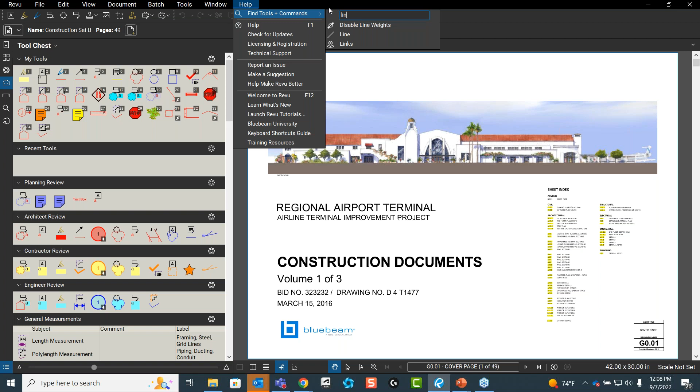Now, the other piece that I'll make for any newer users is a lot of times it can be kind of hard to find some of these different tools and commands. You know what you want to do, but you don't know what it's called. You can typically utilize under Help the Find Tools and Commands. As soon as you start typing it in, it's going to find that tool for you, and then you can just click on it.

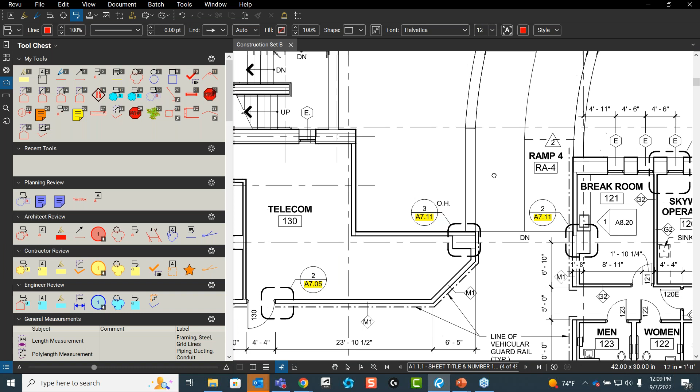So the next big piece that I wanted to talk about with your markups: if we use a tool such as this callout here, let me get over into one of my other pages. I'm going to place my callout. So at first, when I place this callout, let me make sure that my line width is set to 1.

A lot of times, by the way, you'll notice with your callouts, sometimes the Cloud Plus, your border line isn't showing. That's typically because your line width is just set to a standard of 0. You can adjust that to a 1, or even just grabbing your shape here and changing that shape will actually establish a line width for you.

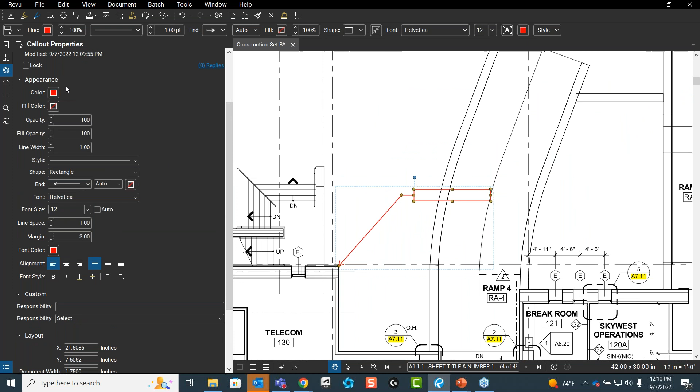Now, one big thing that I like to say here is that if you're changing anything about these tools, whether it's the color, the opacity, the fill opacity, and you know that you're going to use this callout tool like this every single time, or at least this is where you want to start from, scroll down to the bottom of your properties menu here, the callout properties, and you'll find Set as Default.

This just sets it so that when I go back to Markup and I go to Callout, notice that I don't need to adjust the line width or anything this time because it just remembers it. It starts from that every single time, so you don't have to constantly adjust that.

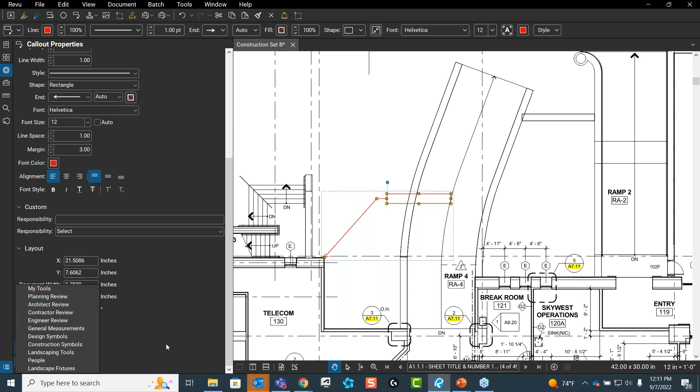Now, as we talk about customizing these markups, one big thing we need to talk about is the other way to save your tools, and that's going to be the Tool Chest. We talked about Set as Default at the bottom of your properties. Right above that is Add to Tool Chest, and this lets you take that tool and push it right into the Tool Chest.

Now, what does that do? When you save your tool into the Tool Chest, it allows you to reuse that tool. You'll notice here with my recent tools, I can click on that callout and it gives me an exact copy of that tool. But if I double click on it, it gives me the capability to start a new callout. This is a very helpful note. This is called the properties and drawing mode.

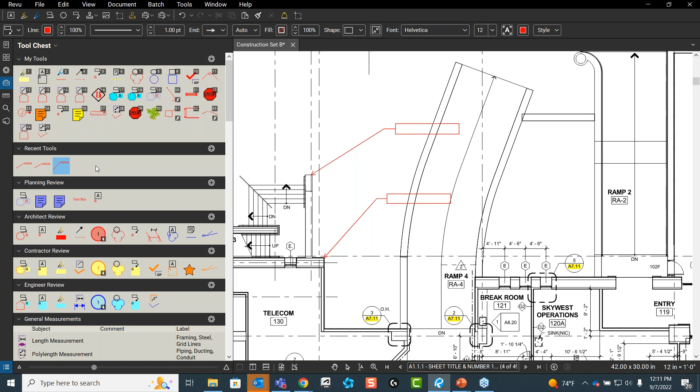Any of these tools that you save into your Tool Chest, if you double click on it, you'll notice that the symbol will change. If you have a common note that keeps coming up, like an RFI or see details, you can utilize an exact copy of that original and place it around as many times as you need.

Now, some of you may be asking, Dave, mine only lets me do one tool and then it escapes and I have to start over again. Well, for that, you want to look under Tools and then Reuse. As long as this is turned on, you should be able to keep placing those comments around the sheet or around the document as many times as you need.

But again, that's a double click, and that's that properties and drawing mode that are going to give you the capabilities there to essentially copy that markup and keep placing it as many times as you need to.

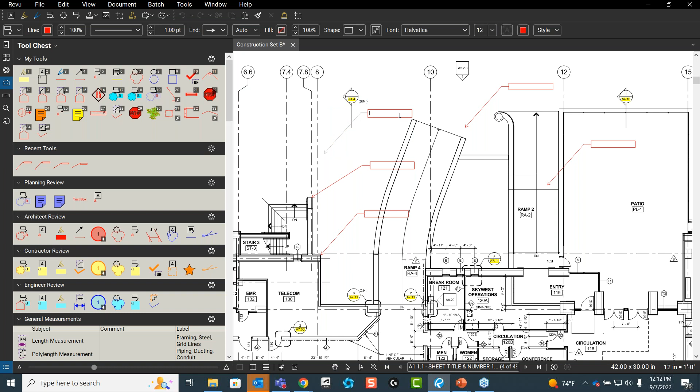Now, some of you may be asking, what's the benefit of starting over new though? Well, if you start over new, if I place a comment inside of here, such as See Detail...

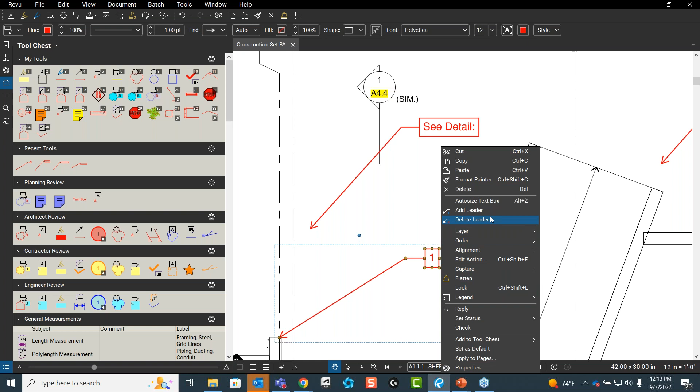Okay, now I probably should have said it was going to do this before I had it do it, but you'll notice that as soon as I finish typing, let's say I do 1 here, notice how my call out automatically sizes to the text within. I don't actually have to go ahead and right click on that and auto size text box. It's doing it automatically for me.

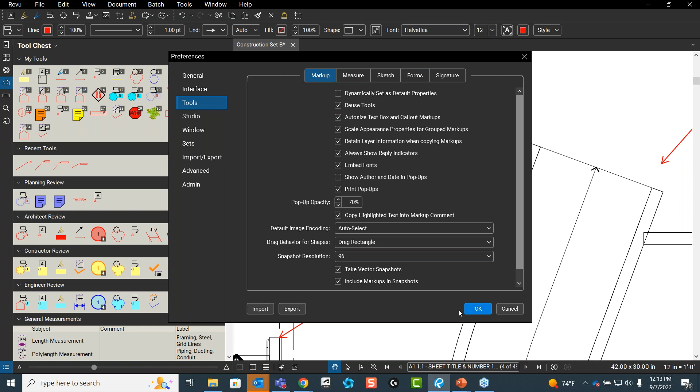This is actually because of a setting in your preferences. If you go to your tools here and markup, you'll see auto size text box and call out markups. If you check mark this setting, every time you finish typing into your call out, no matter how far you drag it out, it'll go ahead and pull that right back to your text, okay?

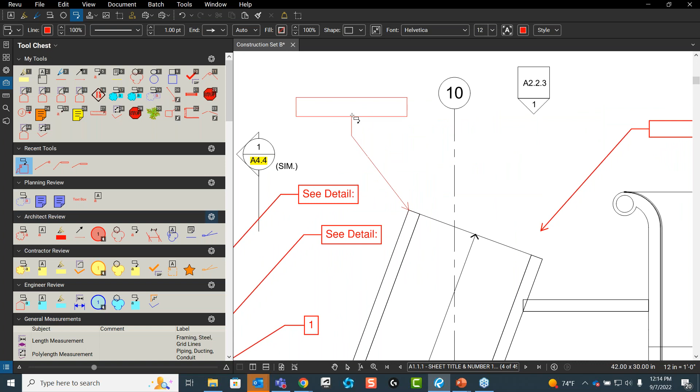But going back to my point here, you'll notice that with See Detail, got that here, right? If I double click on this one, it just gives me the capability to utilize that call out again, but without the text inside of it. It gives me a brand new call out.

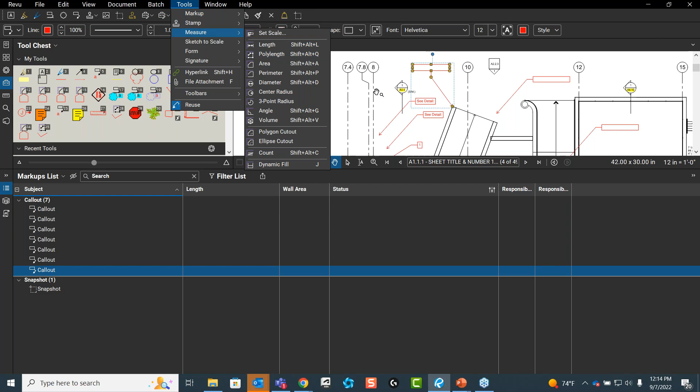Now, the other thing I really want to talk to you guys about, let me go ahead and get down into my markups list here. The big thing you'll notice when you use a tool from markup or tools up here, markup or measure, anything like that, you'll notice it's always going to give that markup a subject of what it is.

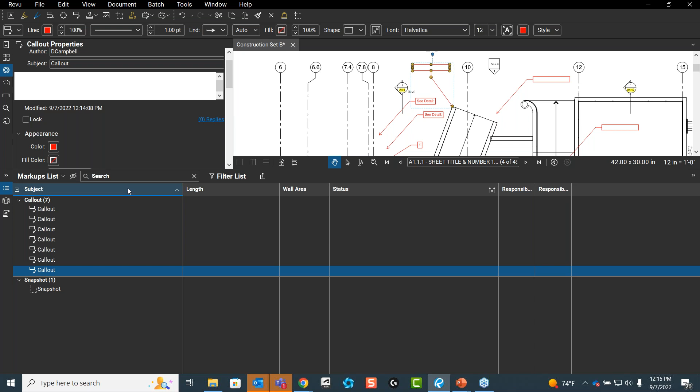It's a call out, or it's a note, it's a line, it's a rectangle. It's always going to do that for us. And that's kind of nice, but in the same sense, it makes it a little hard for us to look through these different comments down here and find specific comments, such as maybe from the contractor or from an engineer, or if this is a correction, or if it's a type of landscaping plant, or structural element, whatever it may be. You'll notice that the tools in their default status here, that default column, the subject, excuse me, they don't give us much information.

So a big thing I wanted to talk about here is, let me go ahead and get back into my tool chest. You'll notice that if I scroll down into some of my other tool sets here, they're actually giving me the subjects of these different tools.

Now, you'll notice here, such as in my construction symbols, phase 1, switching, blocking, diffuser, gate valve - we can start using these subjects to really specify what type of markup this is, or what the element is in general, whether it's a plant, a tree, a fern, a man, woman, a boy, a bench, EV, fence, anything like that, lamp post, what have you.

Now, some of you may be wondering how I got my tool chest to look like this. Typically, what you'll want to do is find this little properties gear here, this little slider, and go to detail. If you go to detail mode, you'll notice it'll give you the subject and any comments or labels that are on these different markups and measurements.

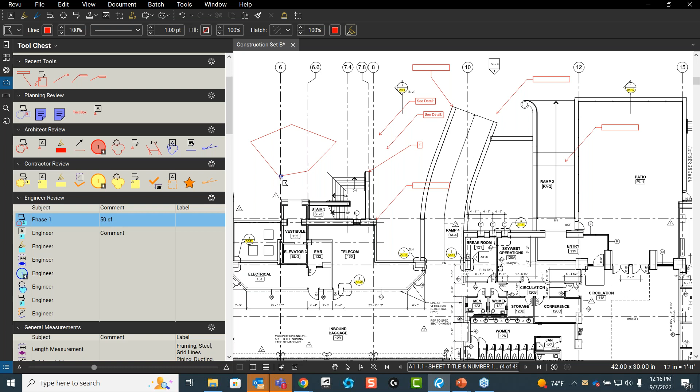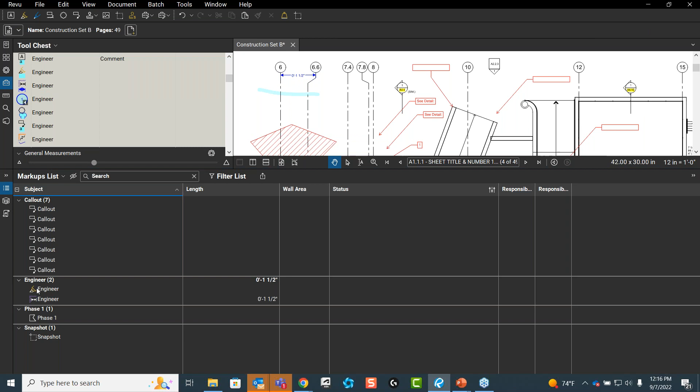So one big thing here, just like I said earlier, if I have an engineer comment, if I place this markup, you'll notice it actually calls this phase 1. Let me escape out for a second - I must have clicked on phase 1 instead of my engineering here. But if I go back to my engineer, there we go. So you'll notice anytime I use one of these comments from an engineer, it's going to group it together underneath that engineer subject. Now I can do this with any of my markups.

Now, to do this and make it stay, or essentially put it in the tool chest like that, what you'll need to do is grab one of your comments, such as my See Detail here, in your properties. You'll want to grab that subject, and let's just say this is going to be a detail comment.

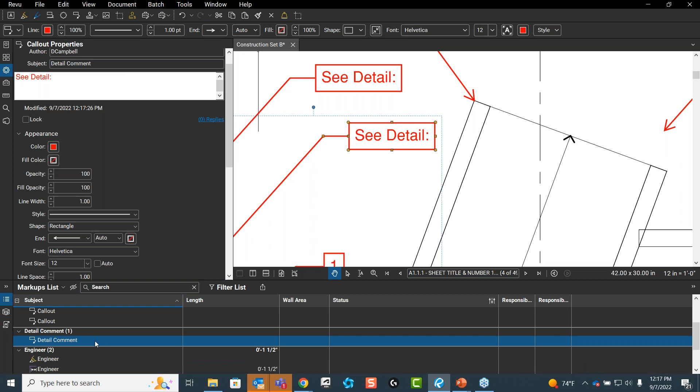Notice as soon as I change that, it reflects that change for that subject here in the markups list.

If I add this to my tool chest, I'm going to right click on that markup and place it in my tools. Anytime I go to utilize this, it's always going to have that detail comment subject. Even if I double click on it and it gets rid of the See Detail, it's still going to keep that customized subject. So that's one way we can start making our comments a little bit smarter.

Now, the other piece I have to talk to you guys about - I'm trying to make sure these are bite-sized pieces of information, but valuable tips and tricks for anyone attending this webinar.

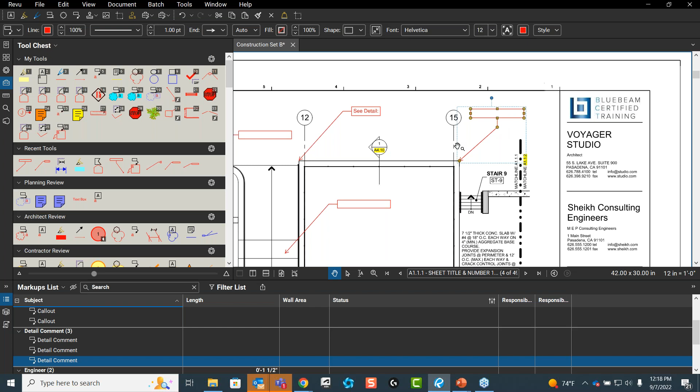The other piece I want to make here really quick - if I go back into the properties of my markup, you'll notice down here I have the custom columns. If we go into our markups list, then columns, under manage columns, you'll notice we can create custom columns to put more information into our markups.

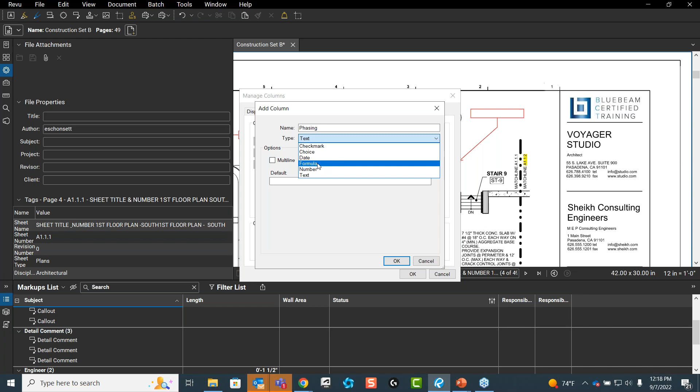So in this case, if I wanted to add a column for phasing, I could leave this as text, check mark, choice, date, a formula, or number. With this phasing, I'll go ahead and hit OK here, and there's my phasing. If I know one portion of my slab is going to be poured in phase 1, I can go ahead and find my tools, probably my measurement tool.

And you know what, I'm going to switch profiles here really quick, so I can go to my takeoff, quantity takeoff.

And we should be able to find - where's my concrete? Oh, I thought I had one for it. Let's see if I can find it. Oh, there it is right there.

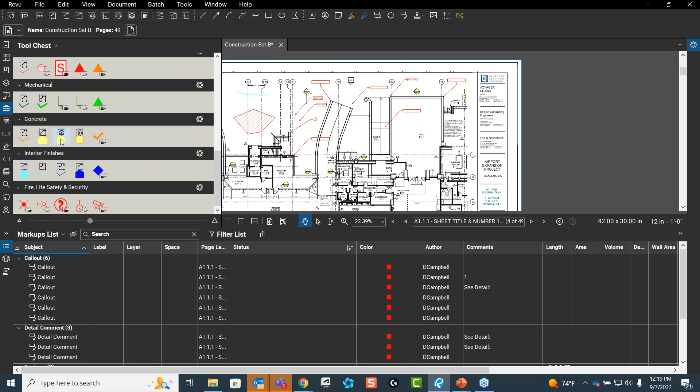Okay, so if this is going to be a 4-inch concrete slab, at this point I could go ahead and draw the volume out for my concrete slab.

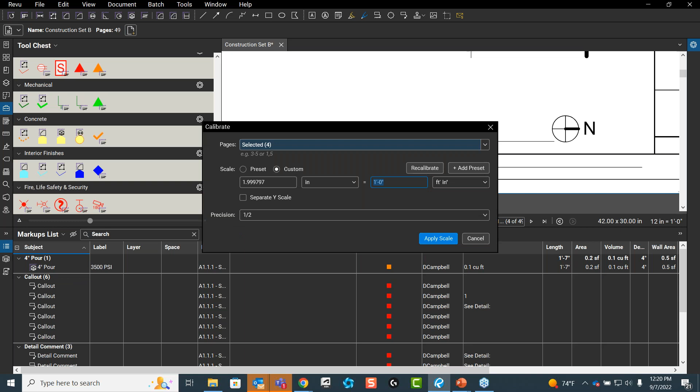Now I will need to, of course, calibrate this - right now my document is not calibrated. Let me go ahead and calibrate this really quick. I'm going to go to custom, calibrate, use my 2 points here on my scale, and tell it that it is 16 feet. Apply my scale.

And there's my slab. So again, at this point, if I know I want that phasing to be here, I'm going to go ahead and turn off some of these other ones.

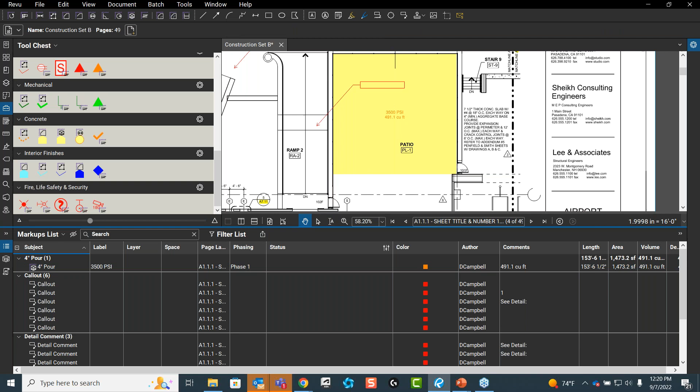And at this point, I could type in phase 1, I could type in phase 2, what have you. Again, this just gives us the capability to put more information into those markups.

Now, my subject column, or my properties panel, switched over here because of my profile. But what I wanted to show is that information will apply right here, any custom columns that you guys make. Now, the other nice piece about that is, just like with our takeoffs and estimating...

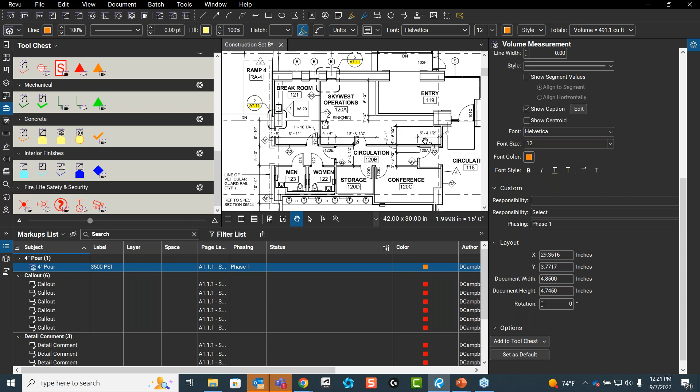If I wanted to make a custom takeoff, let's say for how many studs I might need in this wall at a 16-inch spacing, you'll notice that with my poly length tool, it's going to give me the length of the wall or the length of the segments, and I can even have it give me the height of that wall.

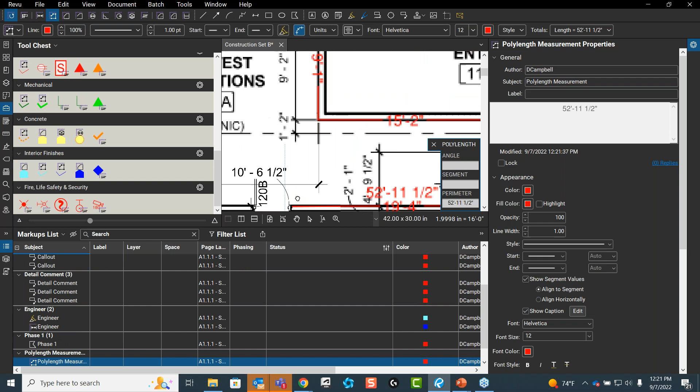But how am I going to tell it that my stud spacing is 16 inches on center? Well, that's where we would go in with our custom columns.

So we'll see here within my poly length tool, if I scroll down, and go over to my measurement panel, the depth here will give me the wall height. Okay, so that gives me 8 foot, and now I will have a wall area, and that should be right in here. Where's that wall area?

Turn these off. There we go. So it gives me that wall area of 423.7. But again, we don't have that 16 inches on center.

What we would need to do is go ahead and go into our markups list, manage columns, and that's probably where we'd go ahead and create a formula. So you could call this number of studs, and we'll call this 16-inch space on center. So we're gonna do equals length divided by 16.

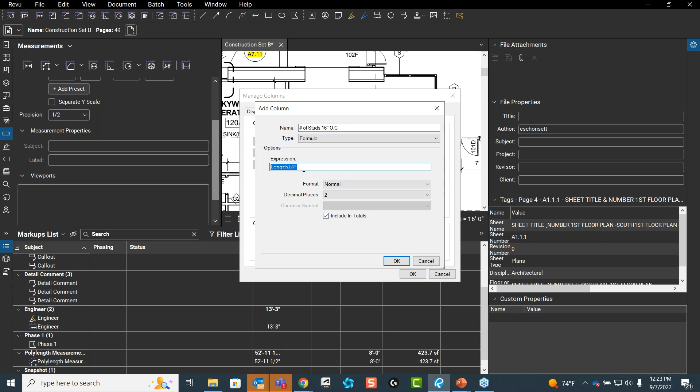Now, what I need to do here... contains invalid characters. So I need to go ahead and figure out why it's not letting me do this. I think I'm using the wrong character. But essentially what we would end up doing is writing that formula to give us that answer down here below, which at this point, I know what's going on.

I have to actually go ahead and change my units. Let's do inches. The reason why we need to do inches instead of feet inches is because when I go to do that length divided by 16 inches to give me how many studs I would need on center, right now it's giving me feet inches instead of just inches. So I would need to adjust that so that it reads correctly.

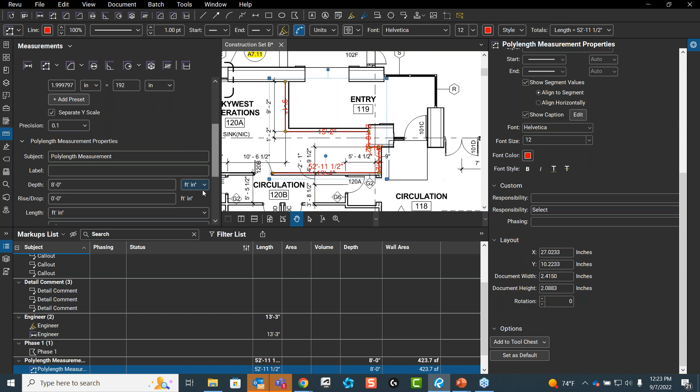That's fine. Length is going to be in inches. There we go. And this one, depth, we can just do in feet inches. That's still fine.

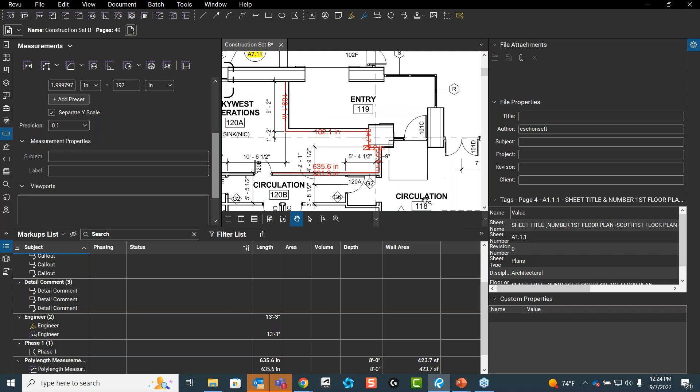But essentially, again, at that point, I could go ahead and create those custom columns to give us any of that information we may need with these markups, to help make them smarter, help our takeoff and estimating workflow, or maybe you're trying to filter through these different markups in a design review, and you're trying to find specific markups, whether from a contractor, an engineer, or an architect. Utilizing these subjects and adding comments into the tool chest gives you the capability to filter down to these a lot easier.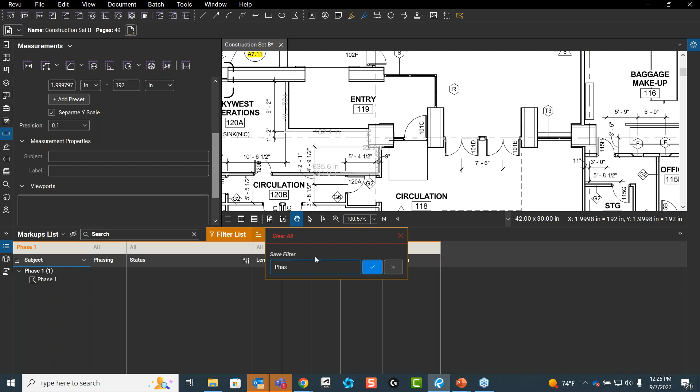You'll notice that I can choose that 4-inch pour, I can choose that detail comment, engineer, phase 1. And the other nice piece is once you have these filters built, let's just say it's phase 1, at this point I could go ahead and save this as a filter. Go ahead and say phase 1 filter, and then OK.

Now, every time I come in here, it doesn't matter the document. This filter list will retain this saved filter through any of our projects as we keep moving forward within Revu, giving us the capability to filter down to specific comments, whether it's takeoff and estimating if you're looking for specific finishes, or design review looking for specific types of comments from different departments or authors.

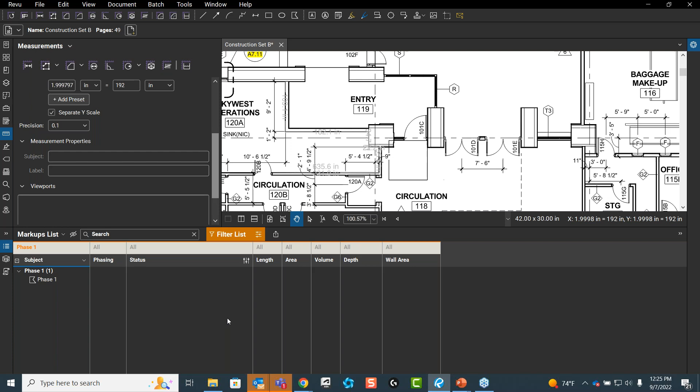All right, so I think that was fast and furious enough. Does anyone have any questions?

We have a question from Steve. Will these markup details be available, accessible outside of Bluebeam? For example, if a PDF is viewed in Acrobat? That is a great question.

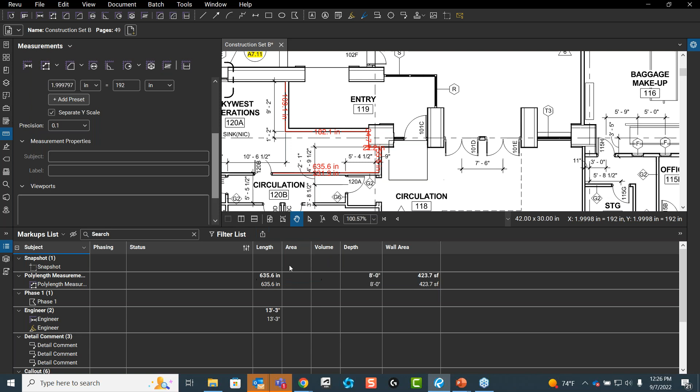So typically the markups list is not available outside of Bluebeam Revu, but what we can do—you'll notice this little button here called the summary button. If we do a PDF summary, you'll notice that you can append any of these markups and hyperlink it to the current PDF. So what it's going to do is make a report of all these different markups and where they're located on the document and hyperlink them to it.

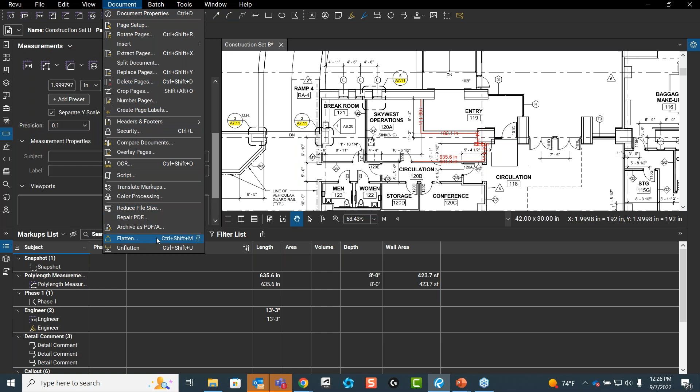So when I hit OK, essentially it gives me that full markup summary, and I can go ahead and click on any one of those and it'll take me there. But typically what I'll do is create one of those and then flatten it. The reason I flatten it is so that when someone opens this in Adobe, they'll be able to see all of the markups on the document, and they'll have this nice little report at the end that they can click on to navigate to any of those comments.

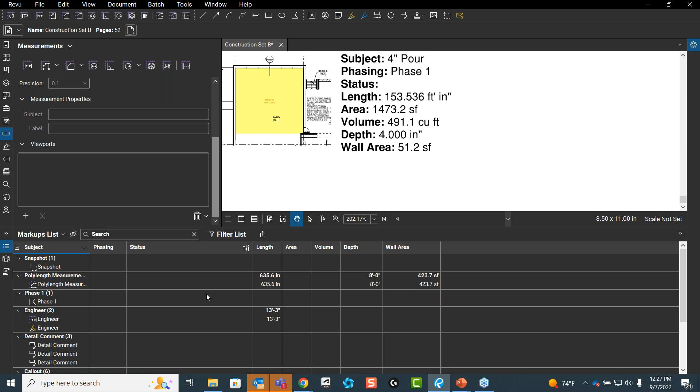And by the way, it will have any of the information from the markups list. So you'll notice I have my subject phasing status. It'll actually keep and retain this organization of your markups list on this report. So that's something generally to think about as you're creating this report.

You want to make sure to kind of look over your columns, make sure they are what you need. If you need the filter on, go ahead and apply that filter list and then create the summary, and it'll only apply to those specific markups.